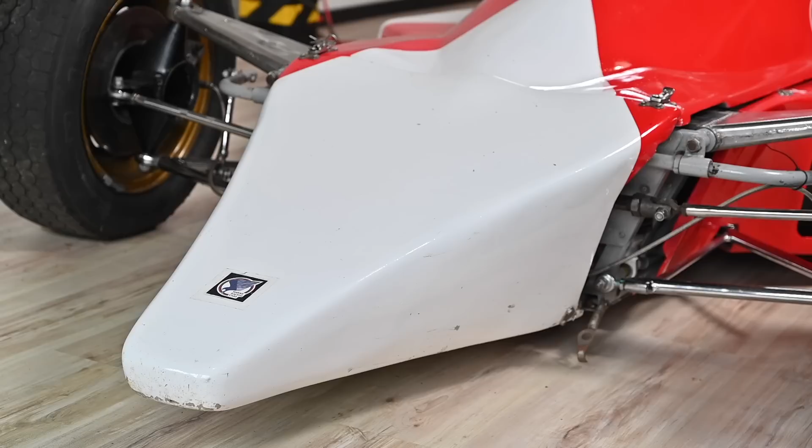And here's the DL19 painted in red and white. You can't miss the DL19 because it has a very, very sharp nose, as you can see. It also makes it very vulnerable because if you hit something, that nose will just shatter. The shell on this classic race car is made out of polyester, and there's a couple of good reasons why they made the shell out of polyester.

One of the main reasons is that you need very quick access to all the different parts, especially the engine, during a race and in between the pit stops. And quick access is really critical in a race, because if something is wrong with the car, you have to be able to get to all the different areas, in the back, in the front, and in the cockpit. And it's not only accessibility. The weight of the shell is very important, because weight is everything in a race. The lighter the car, the better the car will perform.

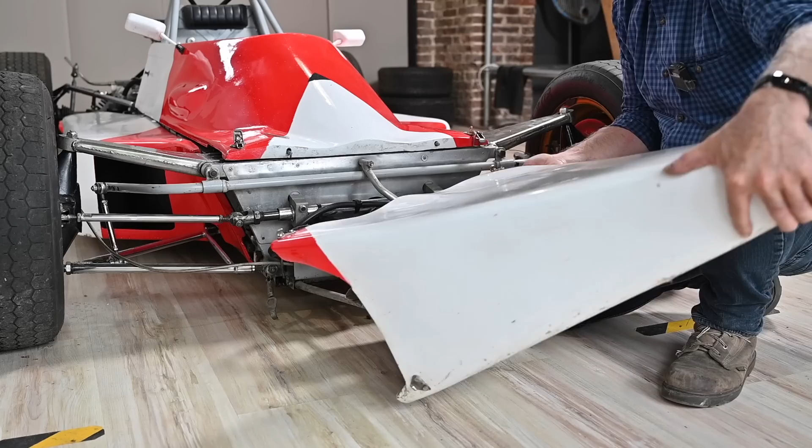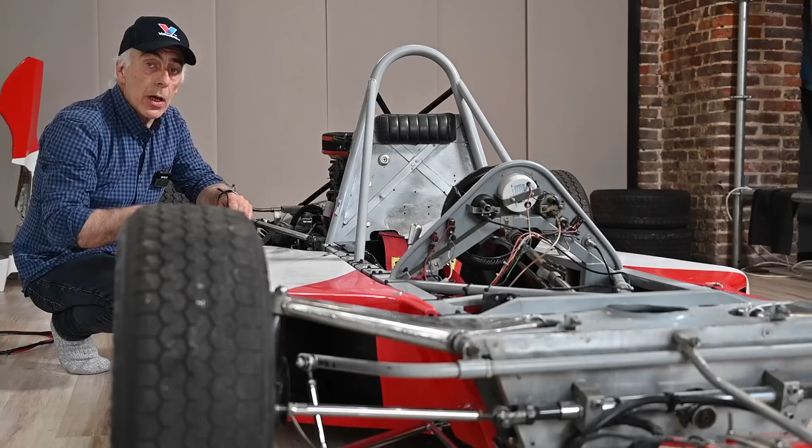Another important factor is, of course, aerodynamics. And the idea is to have a shape of the body that allows the air to stream gently over it. So not creating a lot of turbulence, but just a very smooth flow. Because the smoother the flow is, the less air resistance you have, the more power you have, the faster you can go. But there's a drawback, of course, because the cars are very light, they can actually lift up easily.

Normally you would see spoilers, or wings, or curtains on modern cars. In those days, in the Formula Ford 1600, that was not allowed. These curtains, spoilers, or wings are actually pushing the car down as low as possible and as hard as possible to the ground. So that creates stability. But these cars didn't have that. But they were very low to the ground, and I'll show you that in a minute. You almost sit on the ground.

And on the DL19 you have side ducting, and it's an air intake, so while you drive, air comes in here and it goes through the ducting and it streams all the way to the back, where we have a radiator or an oil cooler. And I'll show you that in a few seconds. And everything is fitted with quick release locks.

Alright, so let's take this off, and don't laugh, guys, because I'm on my socks. The reason for that is that my shoes are making way too much noise on this floor. It squeaks.

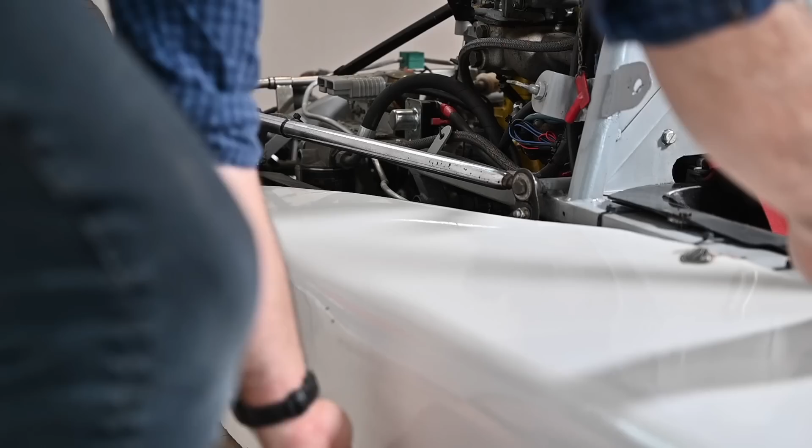Those air ducts actually guide the air towards the oil cooler, and on the left hand side we have an oil cooler, on the other side we have a radiator. With these locks, the polyester tends to crack every so often, so I will have to put some new ones in, but I also will put a new aluminum support around it. Alright, so that should be loose. And in the back you can actually see the radiator.

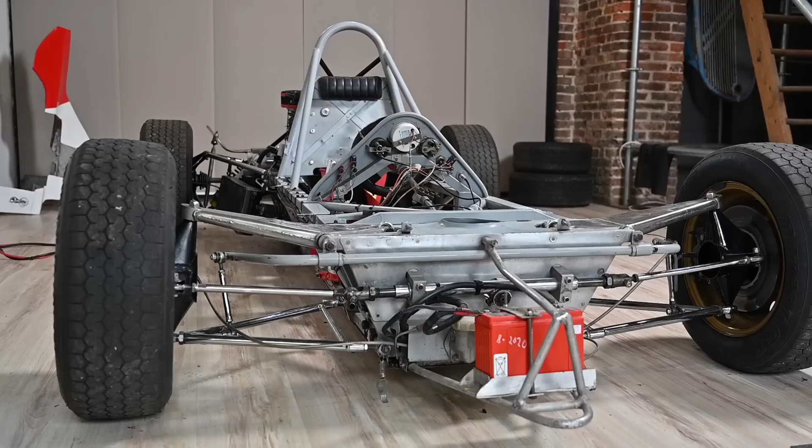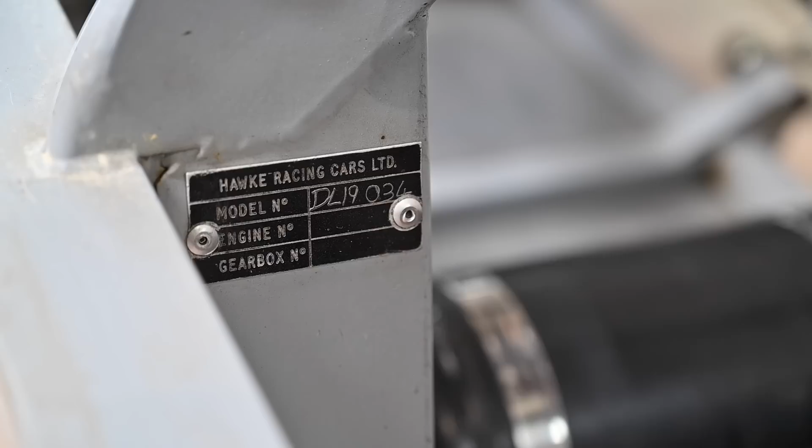And now we have a pretty good view on the frame of the car, and we can start looking at all the different components. And the frame that you see right now is what we call a space frame, and it's very, very rigid and strong. Now remember, I mentioned to you that this was a DL19 and serial number 34, and here's that identity plate inside the cockpit. Normally I think it used to be more on the back on the chassis, so probably somebody moved it more to the front. If it's genuine, I cannot tell, but I think it is.

So let's check how high this is from the ground, and this is about 5.5 to 6 centimeters. So that is pretty low. I think according to the specs that I found, this is a little bit too low, but that might be because of the shocks they've put up.

And there's a very good reason why it's so low to the ground, because in racing you want to have your point of gravity as low as possible. Now let's have a look at the steering. The steering wheel, of course, is removable, otherwise you can't get in and out of this car. It has known better days, but we'll change that. We'll put a new one on, not that expensive.

Now the steering is very direct, and that's also very important. So you actually can feel the grip on the road because of the steering being so direct. Here we have the steering house. So the shaft is coming from the steering wheel right here.

I don't know what kind of a steering house is installed. Is it an Ackerman or not? And if it's an Ackerman, is it a pro or an anti-Ackerman arrangement? But for that we need to do a couple of measurements, and maybe I need to explain what an Ackerman is, just in case you don't know.

Road cars have typical symmetric steering, and that means whenever you take a corner, both wheels are going to turn in the same direction as I show right here. The distance between this point here and that point is the same as the distance between this point and that point. So in other words, the wheels are both in the same direction.

Obviously, when you take a corner, you will have an inner radius and an outer radius. So with symmetric steering, you can't have the inner wheel following the inner radius, and you can't have the outer wheel following the outer radius. It's somewhere a balance in between. And that is okay for standard road cars.

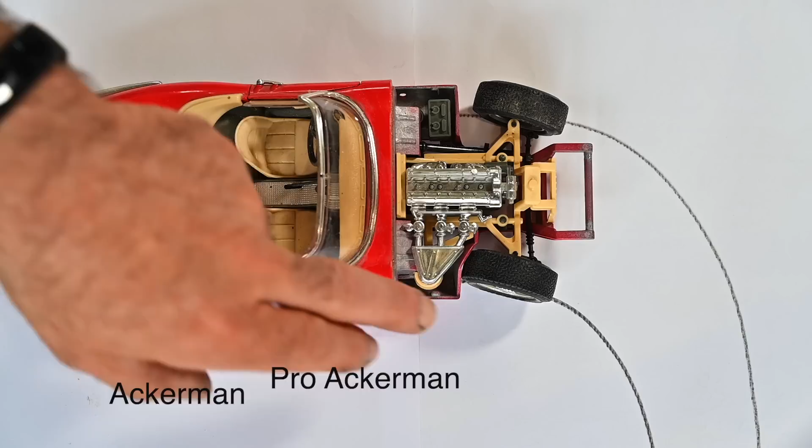However, in racing, that is less optimal, because you're going through these corners at high speed and you really want to corner properly. That is why people apply a method called Ackerman. Ackerman comes in two types: Pro Ackerman and anti-Ackerman. The idea of Pro Ackerman is that whenever you hit a corner, the inner wheel scribes the inner radius, and the outer wheel scribes the outer radius.

So see, I have modified the wheel a bit, so now the distance between this point and that point is closer, and the front points are now wider. So this is what we call Pro Ackerman. The outer wheel will now follow the outer radius, and the inner wheel will follow the inner radius. That works fine. However, we need to think about something else.

Whenever we are cornering at high speed, a lot of the weight of the car is transferred to the outer wheels. And that's the wheel that has all the grip. The inner wheel doesn't have that much grip. Sometimes it even lifts up a bit. So what we want is to steer extra into that corner, and this is what we call anti-Ackerman. Therefore we're going to place the outer wheel extremely inward.

So let me just show you that. See how we extremely turn that in. That will force the car really into that corner, and it will hold it in that whole corner properly because of all the weight being transferred to it. Now there's a limitation, of course, on how many anti-Ackerman degrees you can give to the front steering, because this is going to start wearing out the tire real quick because it's going to scrub.

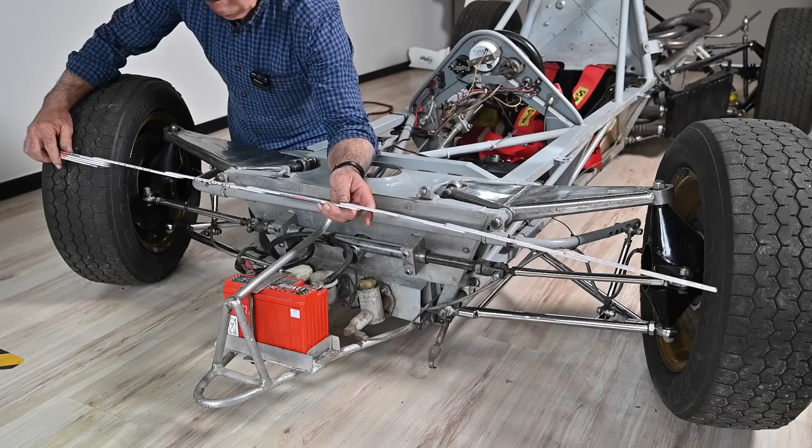So this is 124, and I know I should do it on the rims, but I'm a bit lazy for the moment. But this is also 124. So in essence, the steering house is a symmetric steering house. There is no Ackerman on it whatsoever.

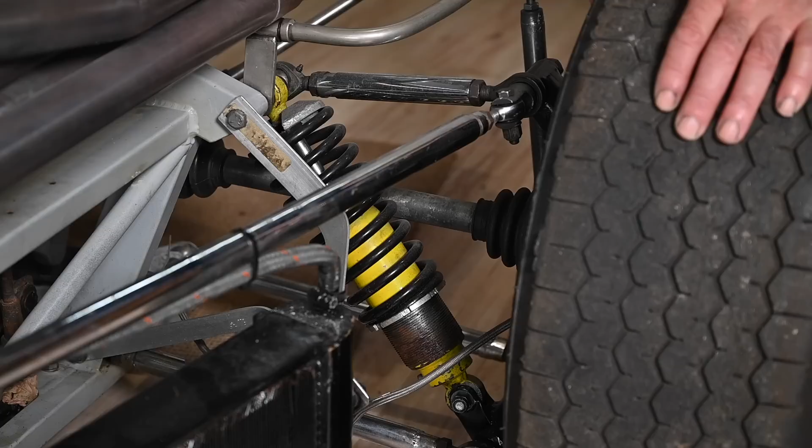So now let's look at the suspension. In the back we got adjustable shocks with a certain rate of springs. I'm not sure exactly what it is, but on the bottom we got the 2 rings, and with that one we can set the preload. I'm not going to do this one right now. This is something we'll do later to check the preload, because that's important, so we'll balance out the car.

And in the front, we got the shocks inside. So this is good for aerodynamics. In the back, they're hidden because of the radiators. But here, they sit nicely inside, and they are even adjustable. So that's the softness of the dampening that you can adjust.

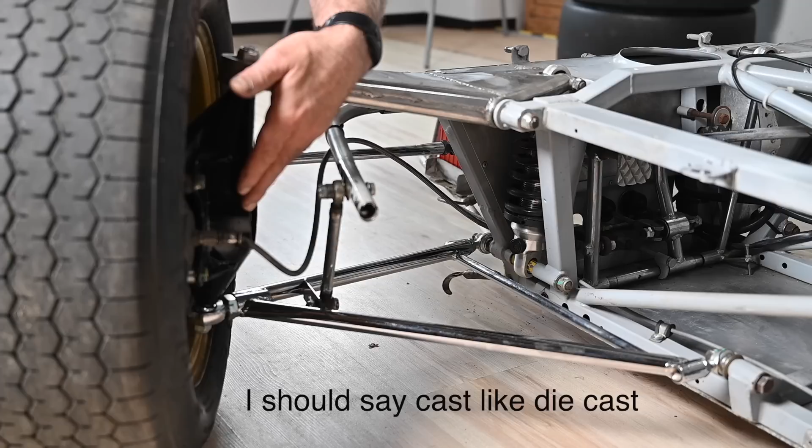And like with all race cars, we have a lower wishbone and we have an upper wishbone. And then in the middle, we've got our upright. And the upright from Hawke is homemade. So they did not decide to have molded uprights because they tend to crack. The ones that they built with steel, they won't crack. They may deform, but they're not going to crack. So it's a bit safer.

In the front, we got an anti-roll bar with a couple of positions, and that is very important for cornering, probably even more than anything else, that you have the right torsion bar installed and the right adjustment. And of course, like any other race car, we have adjustments for the toe-in. So the front wheels, do they point inwards or do they point outwards? This race car should have a toe-in of about 1 degree.

The caster is something that we will measure eventually, but not right now, because that is depending on how much the uprights are moving forward or backwards, but typically they never move backward, they always move a bit forward, so that's the caster. And then we have the camber, which is the vertical position of the wheel. So I think this race car has negative camber, or should have negative camber, of about 1 to 2 degrees, and this is something I'll show you on how you can measure that.

All the other stuff for the final adjustments, I'll make a special video on that one, on how we do a shakedown on this car, how we're going to align it, how we're going to do the preload and all this. But let me show you now the camber on this car, and how you can actually check that.

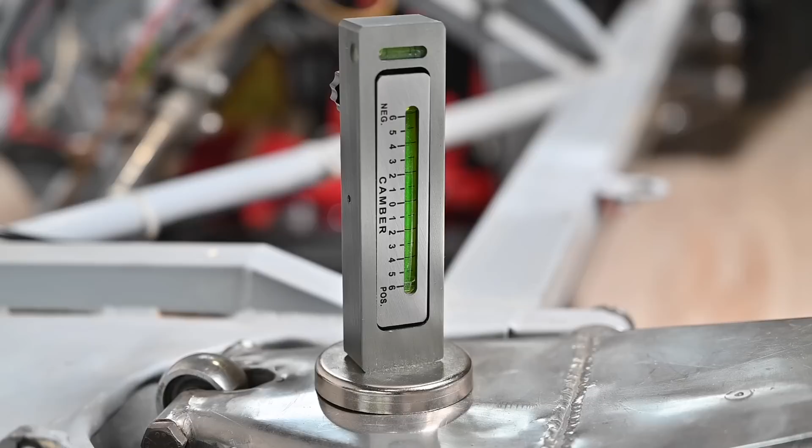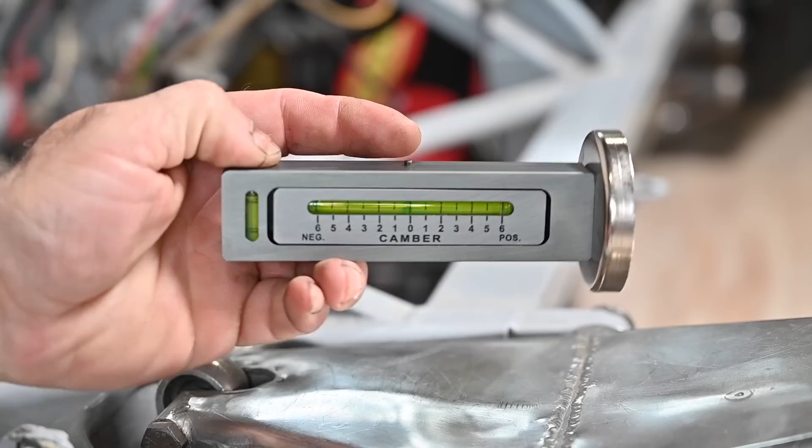Now to measure the camber, this is the tool I'm using, and it's very handy. So you need to align it first with a level. So you hold it horizontally like this, and then you make sure that the level is on this side here, and then you adjust it so it's calibrated. And then all you need to do is stick it to the disc of the wheels, and then you'll see how much camber you have.

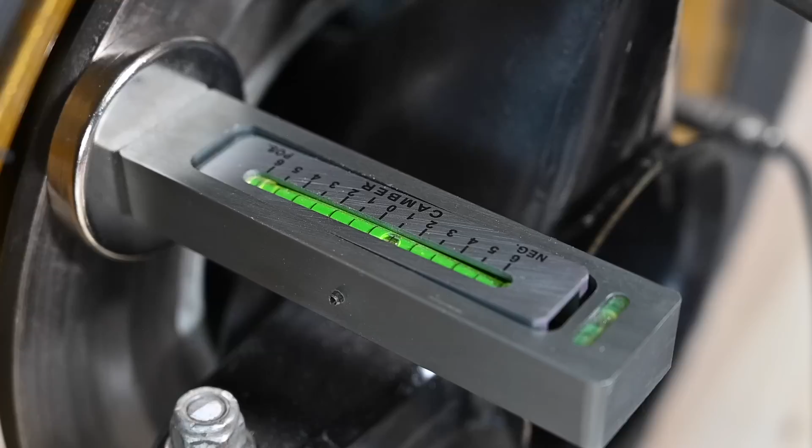So let me put the camber meter on the disc, and of course you got to make sure that the disc is not crooked or anything. Normally you would do it on the wheel hub itself, and it's about 1 degree of camber negative, so that is all right, I think. So let's see what happens if we turn the steering wheel, because that should now change. You can see how that is moving up to 2 degrees. In fact, even 3 degrees, and that is normal, because of the caster that we have on the upright.

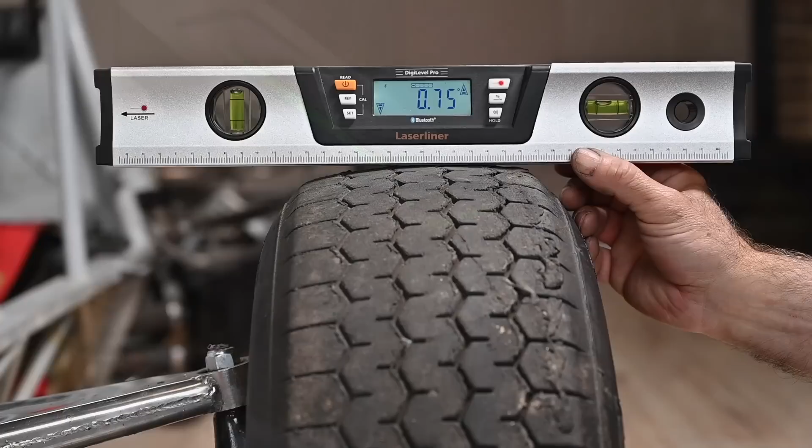I'm having a level on top of the tire, and as you can see, the inner side of the tire, which is this side there, is far more worn than the outer side, and that is just because of the negative camber that we just measured. So if you have too much negative camber, you're really going to wear out the tires on the inner side. If it's positive camber, you're going to start wearing out the tires on the outer side.

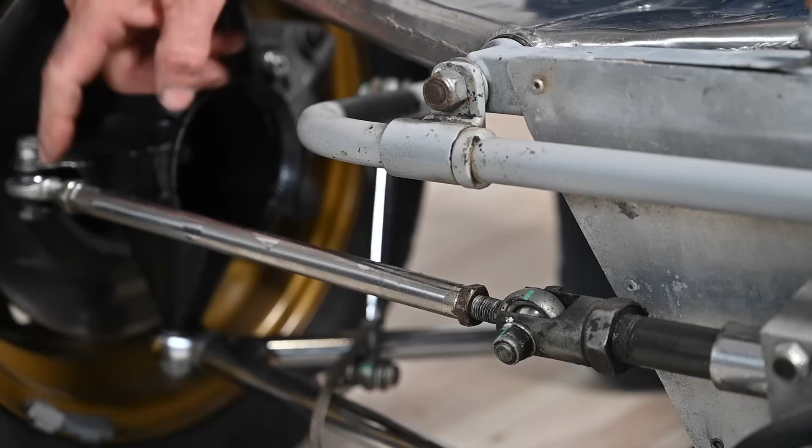Adjusting the toe is done on the steering rods, one on the left and one on the right, by adjusting these bolts here and these nuts. You got to be careful that you do it on both sides about equal, because otherwise it may fall out, or you may have just a little bit of thread left, and that would not be a good idea. So on this car we use toe-in, so the front of the wheel is pointing inwards towards the center of the car, and it's about 1.5 millimeters, I think, of toe-in you need on this as a good common number.

Typically you do that on special scales, and we'll do that later once we get this car ready for the track. In terms of instrumentation, there is not a lot to be said about it, because it's very minimal. So let me take the steering wheel off so we have a better sight.

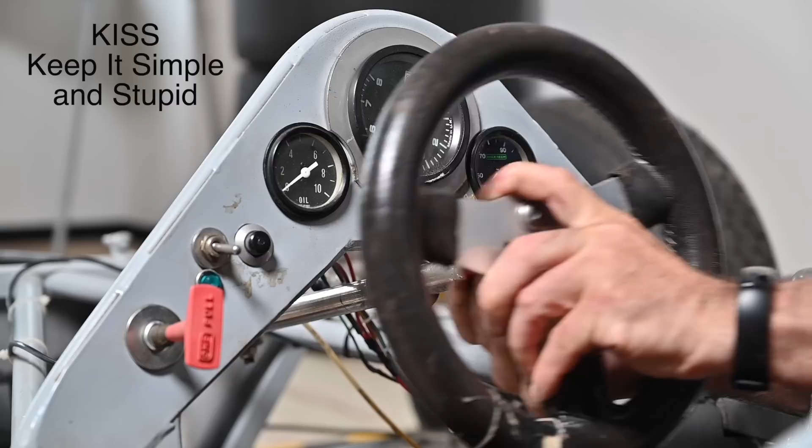To be very honest, the only thing you worry about once you're racing is your RPM meter. That's this one. For this car, I think 5,500 is a good speed to maintain and to shift, and I'll talk about that shifting later. And about 6,500 is about the max on this engine, so I probably will put a red marker up there.

The other thing you want to keep an eye on is the temperature of the water. This is over here, so that should be between 90 and 100. It should not go higher than that. And of course, the oil pressure is kind of a critical element. Now, on this car, I don't know how much I have, but let's see if I can crank it up, and we'll check how much we have.

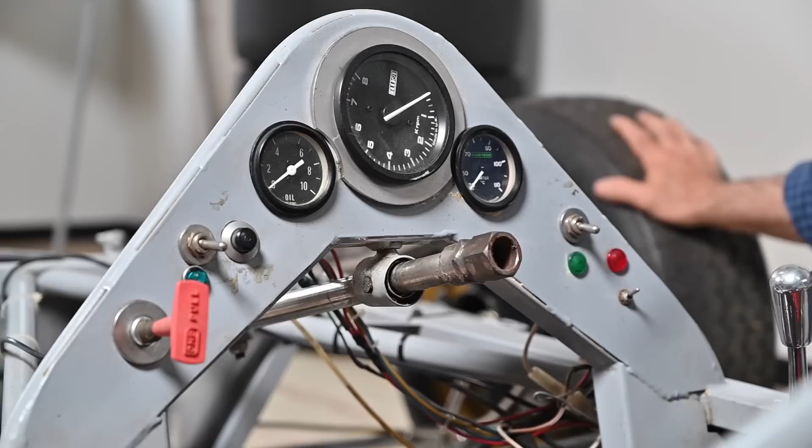I want to make sure it's not in gear, because that would not be good, would it? All right, so let's see if we can get it cranked up. And on this car, to start it, we actually have an electrical fuel pump to kick it in. And you probably can hear that it's pumping now. And then once it's running, we go over to the normal mechanical fuel pumps. Let's see if we can get the ignition on and get it started.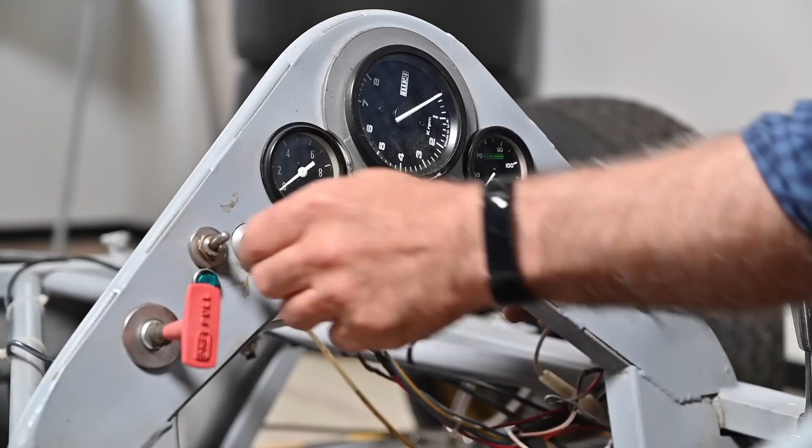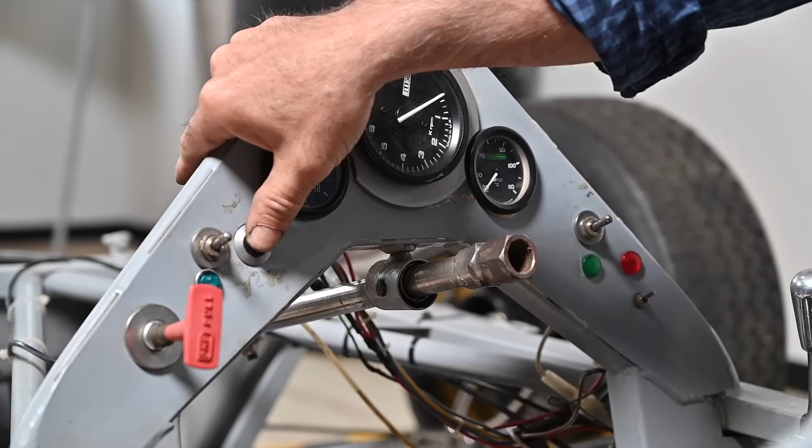Well, I think I have a flat battery, so that's not very good. I think I need to get another battery first, guys, before I can show you that. So in front of the car we have a small battery, and that is intended to power the ignition, some of the instruments and the rain light during the actual race.

Because the car does not have an alternator, because we don't want to lose power. We want to use all the power for the traction on the wheels and not to charge the battery. So that is why you can't really start with this battery. Well, maybe you can start once or twice as an emergency, especially if the engine stalls somewhere along the track, then you can try it. That is why you need an extra battery to start up the car.

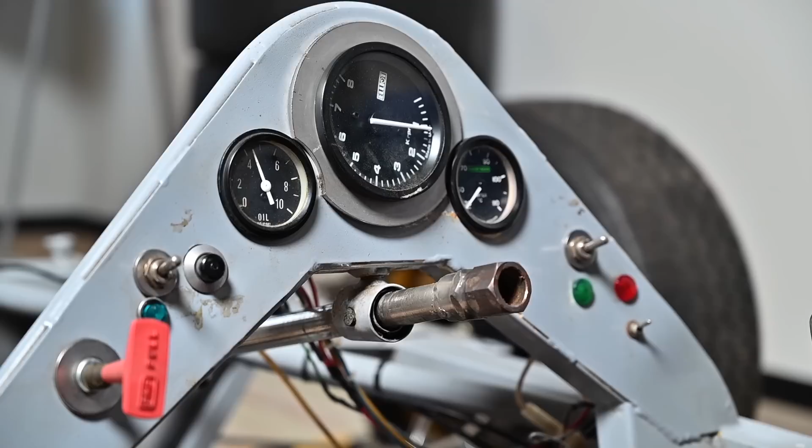This is a battery to start the car. It has a connector that connects to the car, and that's what we use to initially start it up. And that's where the plug is. Let's turn on the electrical fuel pump. We can turn on the ignition, and then we should be able to start it. You can see we got a lot of oil pressure, around 4 bar, which is quite good.

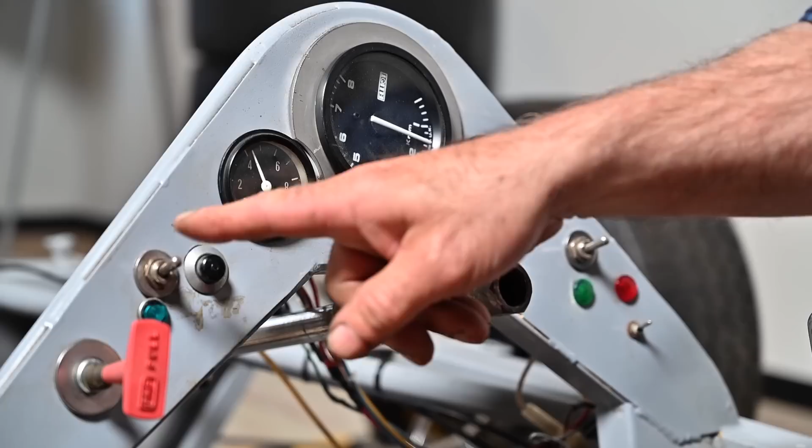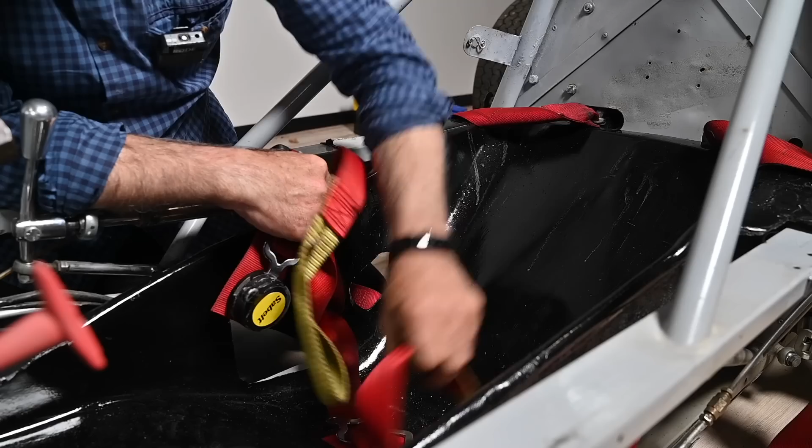The seat is a polyester shell, and I'll take it out in a few minutes. We also got the seat belts, but they are expired by quite some time. So there's an FIA approval, but look at the date, until 2004, something like that. So they will have to be replaced, because this is a lot about your own safety. So let's put this on the side. And this is a 4 connection belt system with leg straps, as you can see.

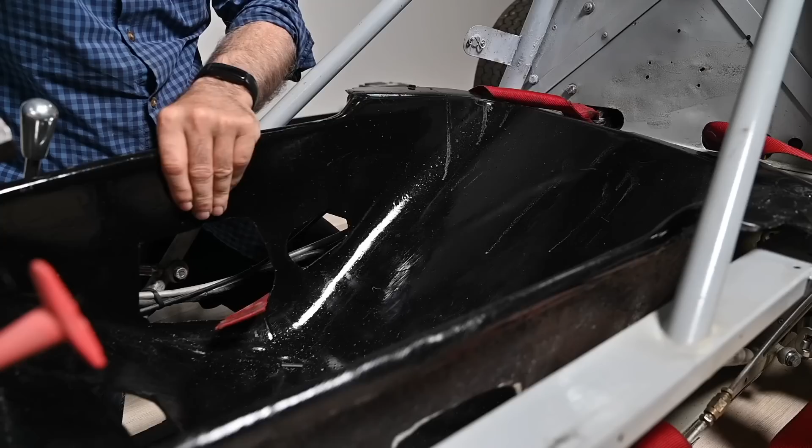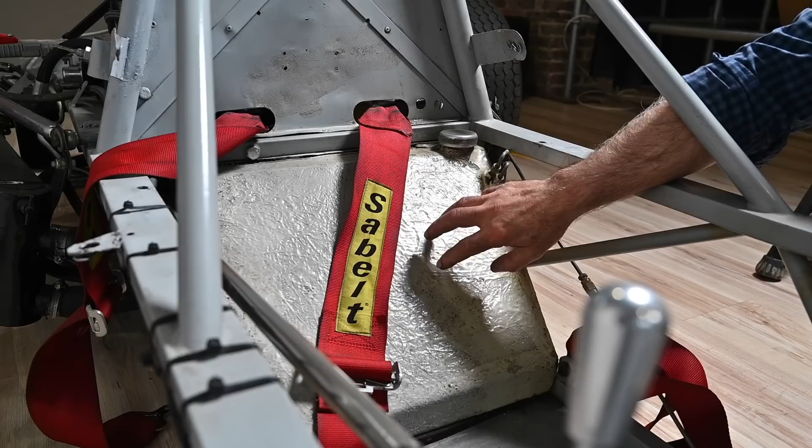All right, so let's see if I can take the shell out. And the gas tank is just below the seat. I don't think this is a fuel cell. This is an old polyester gas tank. This is something I don't really like, but okay, it is what it is.

And filling that up is not easy if the seat is in, because you can't get to this. So this is something I will need to replace or fix. So I'm probably going to have an extension here on the side to fill it up. But in fact, my seat has to come more forward because I'm too short.

And just below your legs, we got the fire extinguisher, and your legs are coming through this opening here. So it's all very narrow, and the fire extinguisher is a pretty big bottle here, but I'm quite sure it is also expired. There is a pull handle on the dashboard to engage the fire extinguisher, which is going down with a cable to activate it.

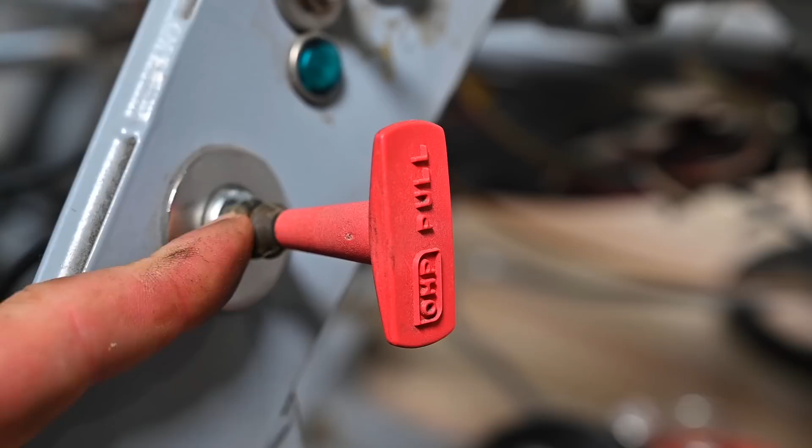Here you have that cable going to the handle of the fire extinguisher, and I can see that the pressure is still in the green, so this is good. So normally that should still work. And this system has a tube which is going all the way to the back to some nozzles.

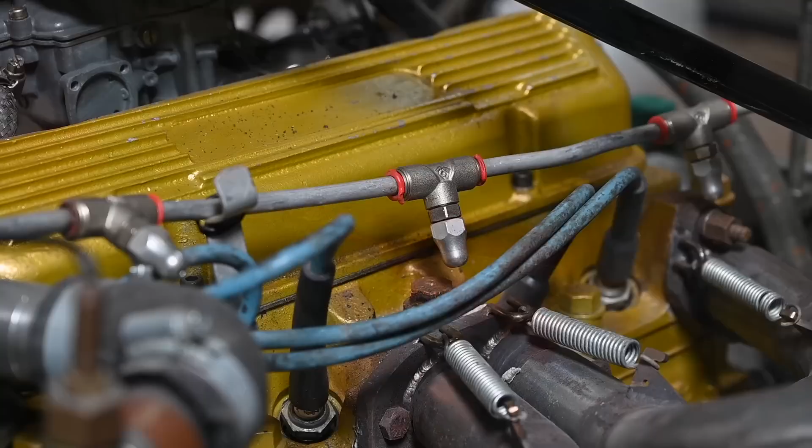So that tube from the fire extinguisher is actually spraying right here on these nozzles on the exhaust manifold. I don't know if this is the right place, and it's a little bit loose, so this is something we probably will fix as well to make it a little bit more tight.

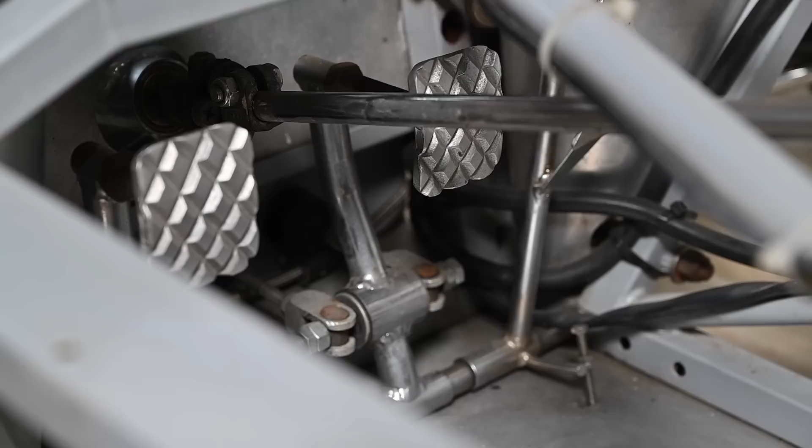Now I'm a pretty short guy, so these pedals are too far down for me. I can barely reach. So we got a clutch, we got the brake, and we have two master brake cylinders, one for the front, one for the rear. And there's some adjustments on the bottom that you can do for the brake balance. It's not with a knob like on the other race car, but that's okay.

On the other side of the brake pedal, we've got two master brake cylinders, one for the front brakes and one for the rear brakes. So I will have to move this a bit forward, and there's an option and more holes there to bring it about, let's say 8 centimeters to 10 centimeters forward. And I also bring the seat a little bit forward, and then I should be in a pretty good condition to sit, because you want to be comfortable.

So this is the rod which is coming from the steering rack to the steering wheel. And here we also have an adjustment, so I can move the steering wheel more forward or backward, and I will have to move it more towards the back of the car, because I'm too short.

The engine that is fitted in this race car is the traditional Ford Kent motor, and this one is prepared. It has about 140 horsepower. It's a 1.6 liter 4-cylinder. The cylinder head on this car has been modified. It's actually a stage 3 cylinder head, modified by Burton. And it is what we call a cross-flow head. In other words, the intake ports coming from the carburetor are exactly across the exhaust ports. And that's what we call a cross-flow head.

The muffler and the pipes are in stainless steel, so this is something which probably will last a long time. And they did a real good job on these pipes. They are nicely bent, and I think lengths are about the same. That's why they made a couple of curves in there to make them about the same length. The welds are really nice. I haven't seen very often such nice welding on stainless steel, so that is pretty good. I cannot complain about that.

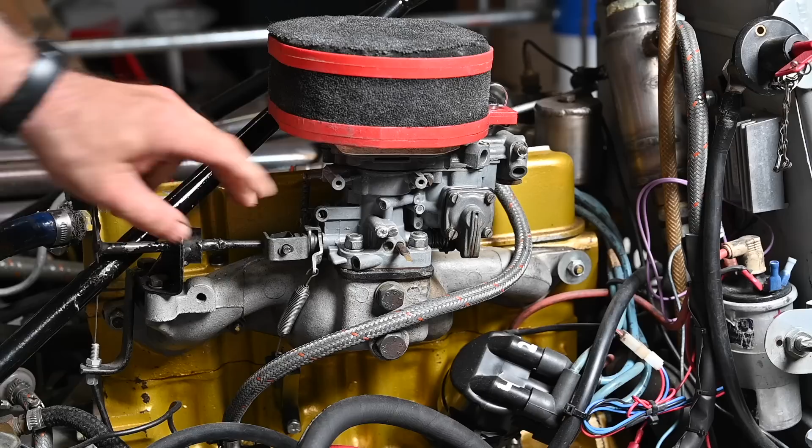Carburetor is a Weber DGAS 3436. Now, you could have Webers on it, DCOEs. Maybe 2 of them. That would give you a bit more horsepower, but this carburetor is not too bad either, so I don't really worry too much about it. There is an air filter that is most likely easily removable. So here we go. So that can go off, very simple. And inside you can actually see the main venturis, and that's the 34.

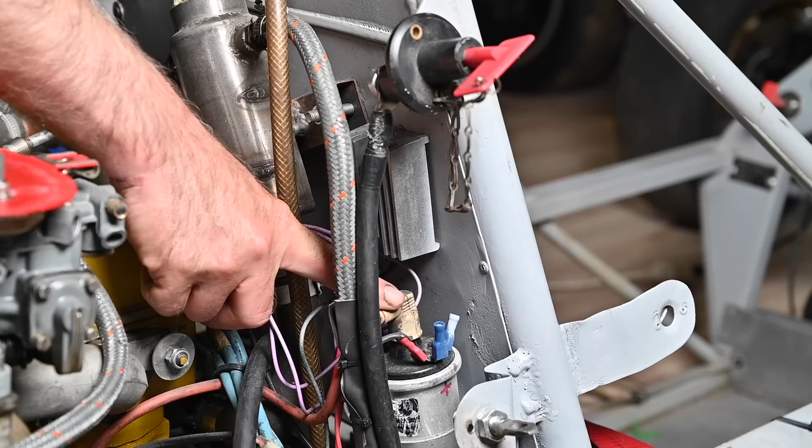As this is a '76 car, we've got the traditional ignition coil on it. Also a traditional distributor, but the race distributor, and we have the electronic ignition here, from Lumenition, which is a good brand. I don't know if it existed in '76, but in any case it's on this car, so I assume it's allowed under the regulations for classic racing.

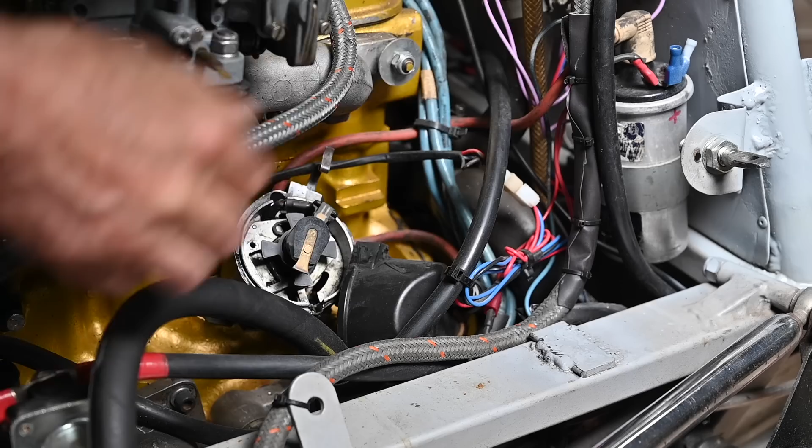And the distributor is over here, and I'm quite sure that we have electronic points inside, so let's see. And as I suspected, we do. This is the rotor, and below that you see these little wings here. This is what is pulsing that LED here. So each time that passes, you create a pulse. It's the same mechanism as what you normally would see on normal breaker points.

But that's not the only thing that has been modified on that engine. It has a light flywheel. It has no alternator, as we talked before. But the main difference is that it does not have a normal oil pan. This is a dry sump engine, and that's specifically for racing. So let me explain to you on the board what a dry sump is, and then we'll have a look.

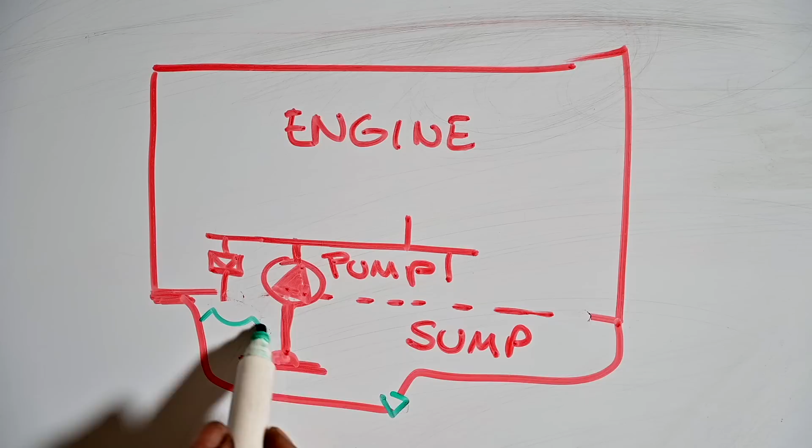Right, so what I have here on the board is a very simple engine. And this is a traditional engine with a traditional oil sump. And here is the sump on the bottom. And I'm sure you've seen all this, and typically you have right here a little plug to let the oil out. And the oil is actually sitting in the sump like this. Right? So when the engine is not running, all the oil has been dripping down from all the different areas into the sump.

As soon as you start up the engine, the oil pump starts to spin, and it's going to suck out oil through this little filter on the bottom of the oil pump, and then it pushes it out through all the channels throughout the whole engine, through the camshaft to the crankshaft to the valves, all that, and then it leaks back into the sump. So basically this is kind of a closed circuit, you could say.

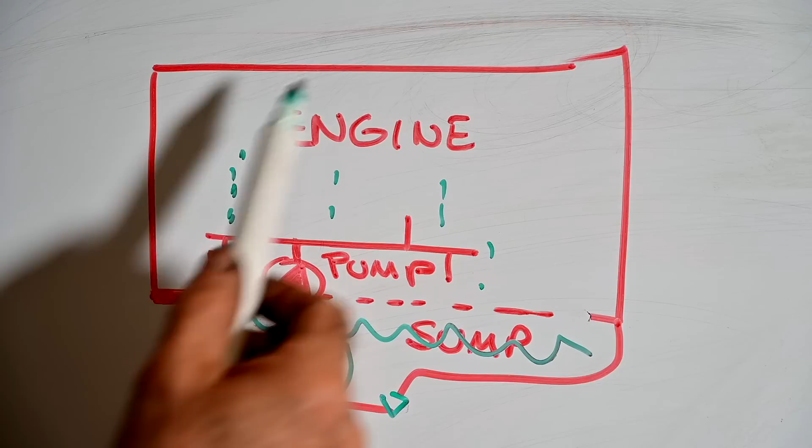The only problem with that is that whenever you take a very strong curve at high speed, due to the centrifugal forces, you'll see that the oil may move to one side. So it might be sitting all here. So now for a very short moment in time, the oil pump is now sucking air. And that's not good because now you have a drop in the oil pressure and you're going to have more wear and tear on the engine. So that is why on race engines you can't really use this.

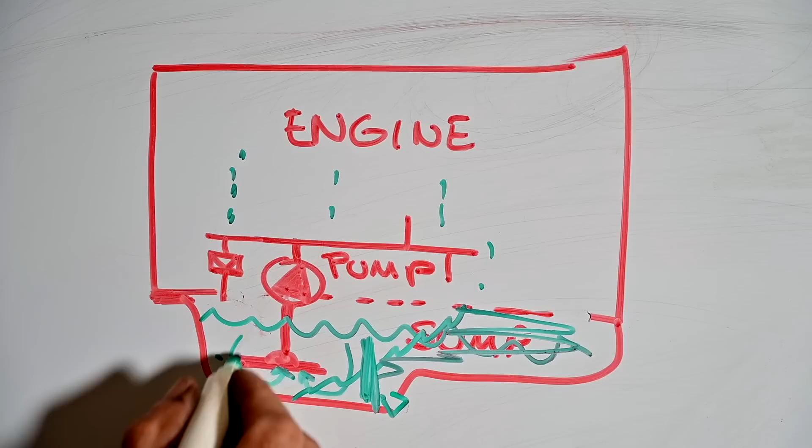Now some people still use an oil sump underneath the engine and they put some baffles in, so dividers. So the oil is a bit captured, it can't move that much, and in between the baffles there are little holes. So that is one method that does work, but it's not really something you should do on a race car. That is why race cars actually have a dry sump. And let me draw for you what a dry sump looks like. So I'm going to wipe this out and we're going to redraw it.

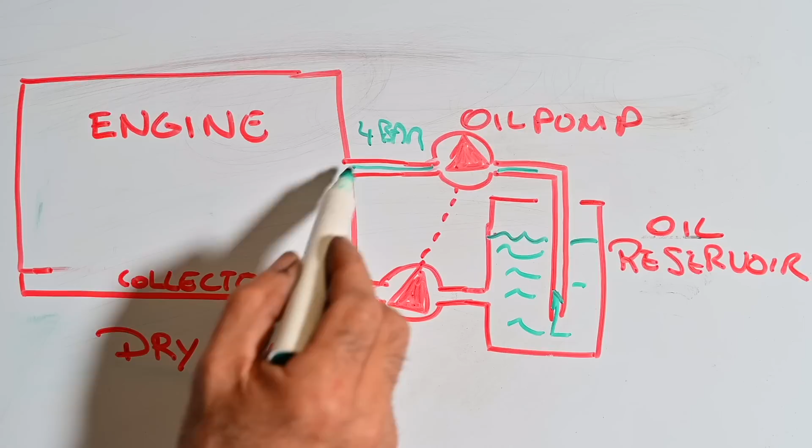On the board we now have a basic diagram of a dry sump engine. On the bottom we have what we call a collector. External to the engine we have a collection oil pump and we have a pressure oil pump, and then we have an external oil reservoir. So the oil is actually all collected in the reservoir. It gets sucked up by the oil pump when the engine is running, and this is the high pressure, the 4 bar that you have seen, and it actually oils the complete engine.

And like any other engine, oil is then leaving the engine and is dripping back where normally you would find the oil sump. But now we have a very thin collector, we call it, and the oil collects in there, it comes together, but then this pump here will drain that collector all the time and push that oil back into the oil reservoir. In fact, I should have shown that a little bit higher up. This is how it works.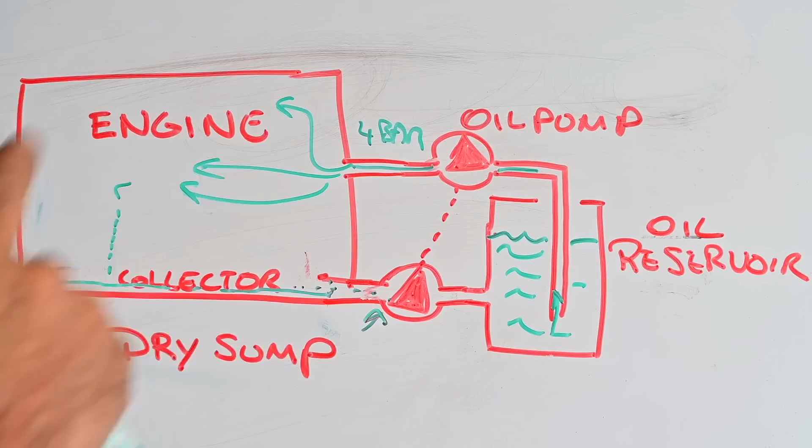So draining this system is a bit of an issue because you really have no drain plug. So I typically suck it out through the filling hole here with a vacuum tube. That works great. Now, in this case, the oil is completely outside the engine, and you have no issue if you corner or you go uphill or downhill, because there's always a lot of oil in this oil reservoir, which you otherwise wouldn't have in the normal sump. So this oil reservoir also has divisions and baffles inside, so that you always have a proper amount of oil inside. This is what race engines always have, and this is the best solution.

Of course, there are more elements to it, like an oil cooler and oil filters. I haven't shown you that, but I just wanted to show you the difference between a dry sump and a normal wet sump that you find on traditional cars. So race cars really should have a dry sump.

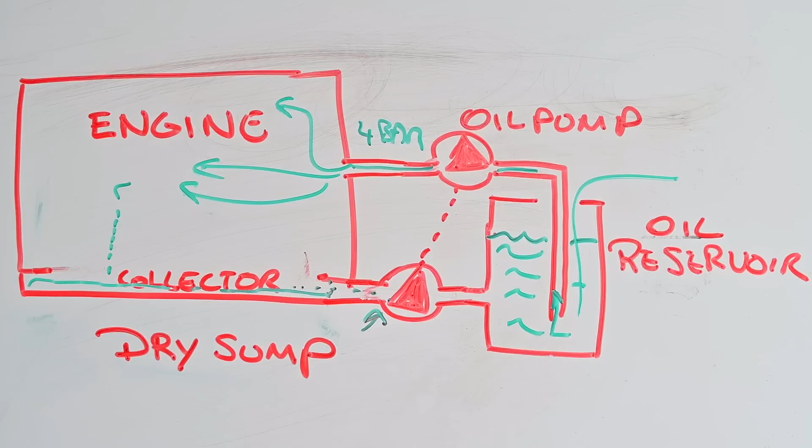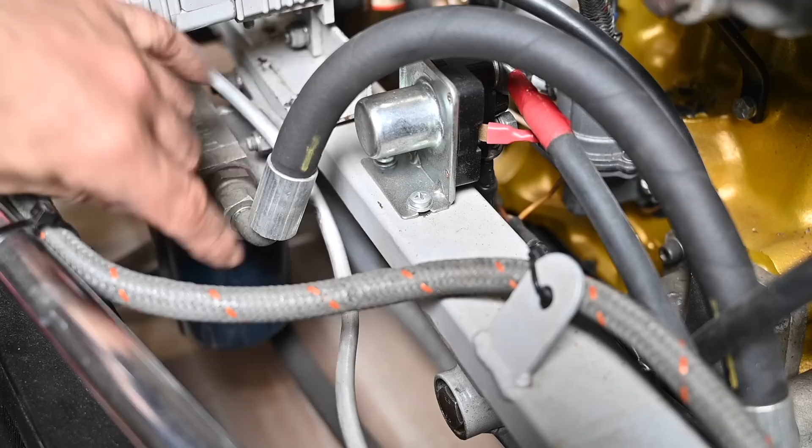And this might be a little bit hard to see, but the oil pump is sitting right here on the external side. And you can see all these big hoses coming out of that. This hose right here is actually the high pressure side, so the part that goes back to the engine. But first of all, it goes through the filter. So the oil is leaving the high pressure oil pump, and then it gets into the filter right here. And then on the other side, it gets back into the channels of the engine.

The oil tank is right here. This is where it is. So this is a big aluminum tank where all the oil is sitting in. Now there's no dipstick on this car because a dipstick typically works on your wet sump. So there's no dipstick. I typically use a stick and I put the stick inside and I'm looking for 18 centimeters of oil, and that should be good enough. So this is how I do it.

Now, since this is a race car and it's going on a track, you're not allowed to spill oil or liquid onto the track because that could endanger the other drivers and yourself.

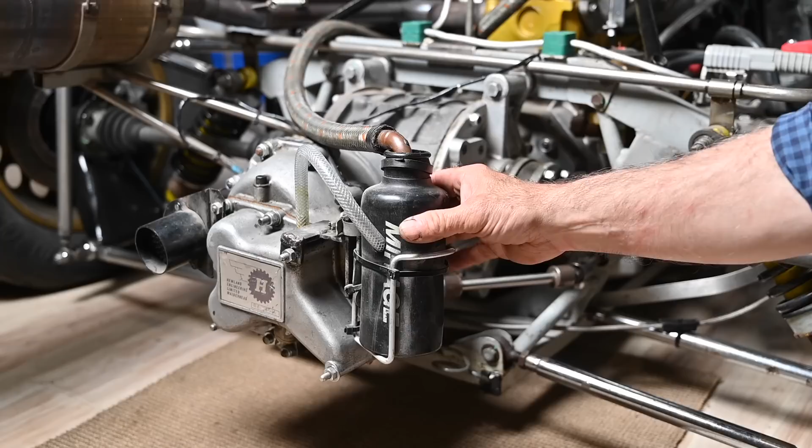And therefore, every race car has to have spillover tanks. Let me show you that one. And this is going to be a little bit of a joke on this car. Any possible spill of oil or any liquid on your race car has to be collected in a spill box. Now, this is kind of a funny one. This looks like a bicycle racing thingy. So I'm probably going to change that a bit because this is so funny.

Now the hose that you see coming in here is a spillover from the actual oil tank, and this one is the spillover from the gearbox, and we'll talk about the gearbox in a few minutes. So this thing I will probably change because this is kind of a funny thing. So it looks like a holder from a bicycle, but it works, I guess. So yeah, but we'll change that with a proper box.

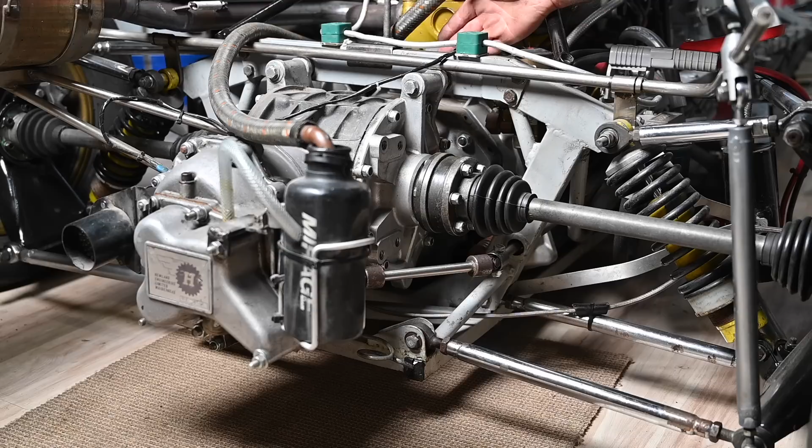We have talked a lot about the suspension already. By the way, this bar here is the rear anti-roll bar. This is a solid bar and again adjustable. But now we need to talk a bit about the gear system or the gearbox. The clutch is over there and it's a hydraulic clutch. Not that you really need it on this car. Well, for first gear you do need it because this gearbox is what we call a dog box. And I'll come back to that in a minute what that is.

Of course, you have your shafts going to your wheels. You have one on the left and on the right. And over here, you have your Hewland box, and I think this is an MK9. And that's where all the gears are in. And this is what we call a dog box. In fact, this part here is your differential, right? So what is a dog box?

Oh, that feels comfortable. So let's talk a bit about the gearbox, the standard gearbox, and then we talk about the dog gearbox that you find in race cars, like on this one. Now, a normal street car has a gearbox. You have 4 gears, 5 gears, 6 gears, whatever, and you have a clutch. So to change gears, you depress the clutch, you let the clutch come at the right time, you change the gear and all this, and that takes a little bit of time. This is slow in race terms. We can't afford that slowness.

The shifting goes very smooth, it doesn't crack, at least if you do it right. And that is because you have synchro meshes inside. Right? And that prevents these tooth wheels, or the gears, from crunching over each other. So you can actually shift gears up and down very smooth. Right? So you're driving actually quite relaxed.

In a race car, that is a bit of a different story. There you are driving violently. I'm going to call it like this because this is actually what you do. You shift real quick because that's important. Shifting fast is so important. You keep your RPMs at around, in this car, 5,000 RPMs, and you try to stay around that, and you shift really quick. And I can't show you that because I'm not on the track, but next time we are on a track, I will actually show that to you.

And now we need another type of gearbox because a synchro mesh gearbox is way too slow. That is why a dog gearbox has been developed. And it's a very simple gearbox, very, very simple. It is one main shaft, and I'm not going to call the technical terms of the shaft, layshafts and so on, but one main shaft where you find tooth wheels on. And they are fixed on that shaft, so they can't really rotate around the shaft, but they are connected to the shaft. And that shaft is driven by the back of your clutch system, so by the engine.

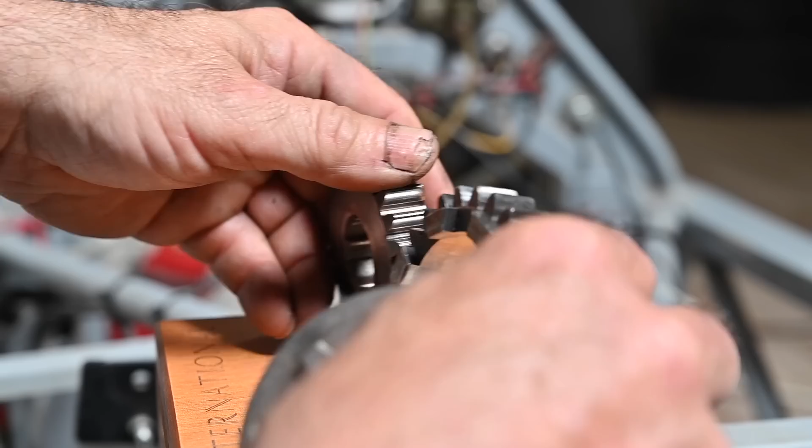However, if you do select it, then we have the dog coming in, and the dog is going to engage it. So let me try to turn this around so we can actually see what the dog is going to do. So here's our dog. And the dog is going to be pushed in to that tooth wheel right there, and it's going to engage with these teeth, like so. And it's going to drag it along, and now we are spinning that second shaft, and it's driving the differential.

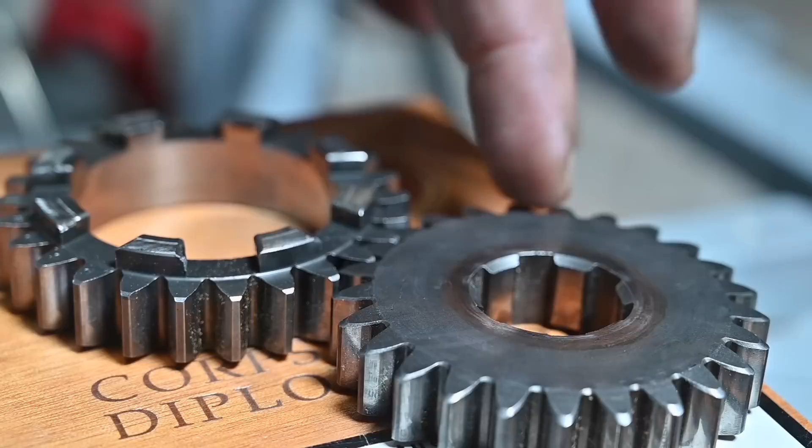So that's what the dog does. It comes in, and it goes out. Nothing more than that. Let me lay it flat so you can better see it. So we know that this gear is rotating because it's been driven by the shaft coming from the engine. This one is spinning around with it because that one drives that one. But now this force needs to be moved to the axle, which is going to the differential. And there the dog comes into play.

And here is our dog. The dog will be pushed in like so. And now we'll have this one spinning around. And because the dog is there, the dog is grabbing now into the other shaft, and now we have movement on the car. So this is how that works, but it will become more clear once I take all the gears out of this car, and then we will put new gears in.

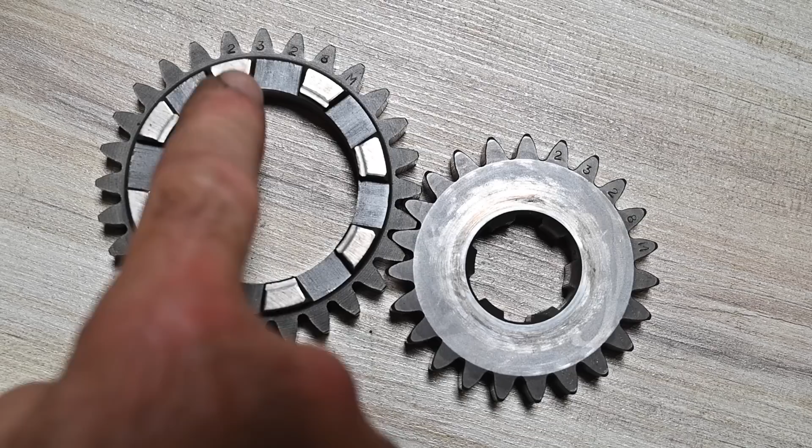If you look closely to those gears, you can see that they have a number in it, 23, 28, 23, 28. So the big one has 28 teeth, and you're more than welcome to count them. And the second one has 23 teeth. So the ratio is 23, 28. You might have heard people talking about sequential gearboxes and non-sequential gearboxes. This car does not have a sequential gearbox. It is an H pattern, so 1, 2, and then 3 and 4. But as you can see, this is not gentle, right? You're going to be a bit rough with this and quick, because this is the speed. You change gears while you're driving.

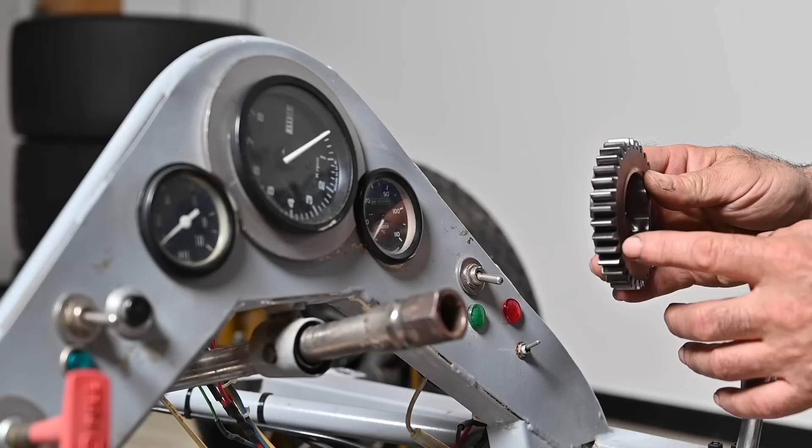I forgot to mention one thing on these gears. You can see that the teeth are straight, and that makes it very strong, but it makes it also noisy. So you will hear these gearboxes for sure. Other gearboxes have gears with kind of slanted or angled teeth like this, and they are less noisy, but they are not as strong because they tend to push things out of each other. Here the force is not lost because it's a one-on-one. The two teeth from the other one, they're grabbing onto each other, and you don't lose any force. But if they are on an angle, then they tend to push away a bit the gears, and then you lose a bit of power.

The rod that you see right there is the one which is actually coming from the front gear selector. And you can turn it left or right to go between 1 and 2 and 3 and 4 gears. And then, of course, it's in and out. And you move it. Now, this works very smooth if you drive. Well, smooth is probably the wrong word, because you're really shifting real quick and a little bit violent. But that's the way these boxes are made for. That's how they work.

So folks, we have come to the end of this video, and I hope that you enjoyed it. We looked at a 1976 race car, which is almost 50 years old, well, a little bit less, in pretty good shape and a pretty good condition. So there's a bit of work to be done on it, because I want to have it perfect to get it back on the track. And then with a little bit of luck, you will see me driving the DL19 on the track maybe later this summer, together with our Koenig race car, because we've got 2 race cars that we want to get on the track, but only if they're in tip-top condition.